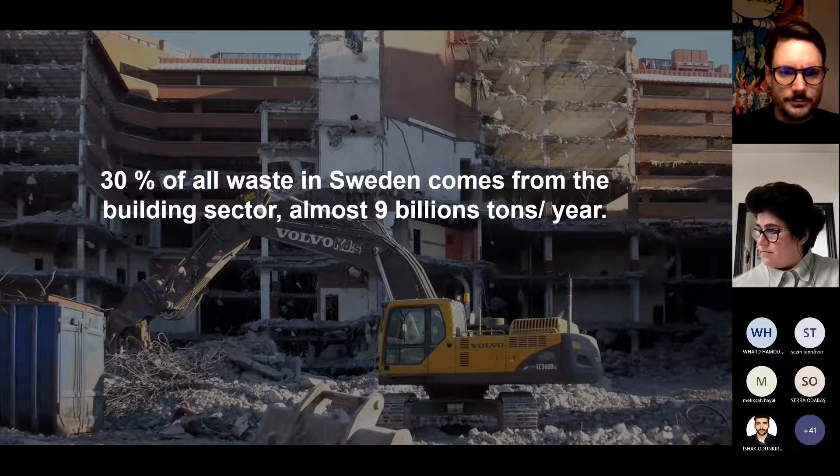At White, as the introduction said, I'm a partner at White. I've been here for 17 years. We work with sustainable architecture, which is one of our goals.

So we think that we have to work in an interdisciplinary manner in order to achieve this throughout the entire design process. We have architecture, landscape, urban design, interior design, project management, sustainability experts, lighting design, transformation, and digitalization, in order to create a holistic approach for sustainability.

Our goal is also to work with the process and the collaboration, because nobody is the expert, and we think that everyone can participate to create a better and richer architecture in the end. We're here for the long term, not just a quick fix.

We are employee owned, so you can only buy shares in the company if you're a part of the company. That means we are a quite resilient company. We don't have to do anything specific with our profit; we can do whatever we want with it.

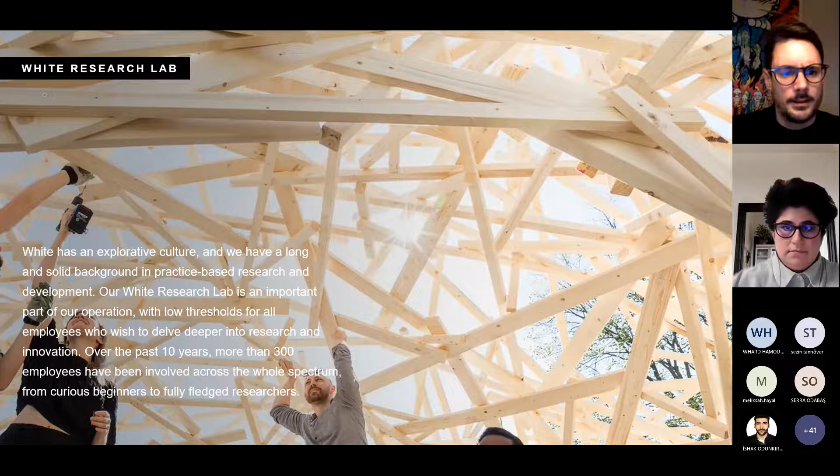We are a big collective gathered around a vision, and that is for all our projects to be climate neutral by 2030 through design excellence. We are following the Paris Agreement, and I'm quite glad that COP27 now recognizes that the built environment or construction industry is part of the carbon problem in the world.

That makes it easier to advocate different solutions, not just concrete and steel. This is a little bit about the history of how we got involved in this project, the Sara Cultural Center, which is the new landmark for Skellefteå. Having this research and methodology helped us convince our client to build this building in timber and not in the conventional method.

This is a culture center with 6 stages for performing arts. It has a city library, an art gallery, and a museum, which were located in different parts of Skellefteå before this competition. So they wanted a new home for this, together with a hotel and a conference center.

The site was the last unbuilt plot in Skellefteå, where this culture center sits. It was used as a bus station before, right in between the train station and the main square. As you can see, there is a sequence of public or civic buildings leading down to the Skellefte River, and by placing a public building here, it also mended the city fabric.

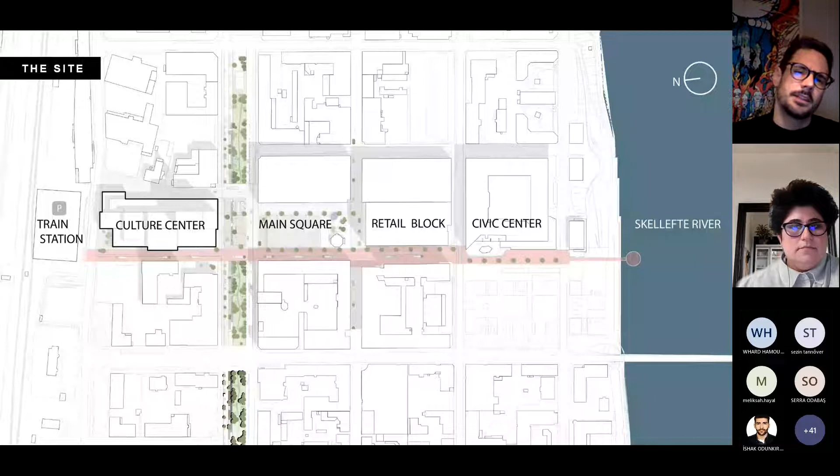For us, this was also a question of how do we challenge this institution to be something more than just a building or a destination. It also has to make the city grow on a larger scale, and interact with surrounding streetscapes in different ways. Thinking about the culture center as more than just a place where you go and see shows, it's also a place where people could meet, especially in this harsh climate, indoor, and co-create and participate in different culture events.

So for us, we started with the thought that no matter what institution was going to be in here, if it was the hotel or the large stages, we put them in the middle, and around it we allowed for people to actually flow around.

We created all the interfaces towards the street with accessibility, so we had entrances in all directions facing the streets. We didn't create any backsides. We also strongly believed in two entrances, one towards the main square and one against the train station.

So you had a flow through the building so that people also had an opportunity to walk through the building, not just a place where you went to and then back again. So there was a natural flow around this building, and with low thresholds around all.

What was happening inside, we also tailor the building towards its contents, creating different scales, because this building has a quite large program, and it was filling up the entire site. But we still needed to be connected to the city, even though we introduced a new scale as the high rise was meant to.

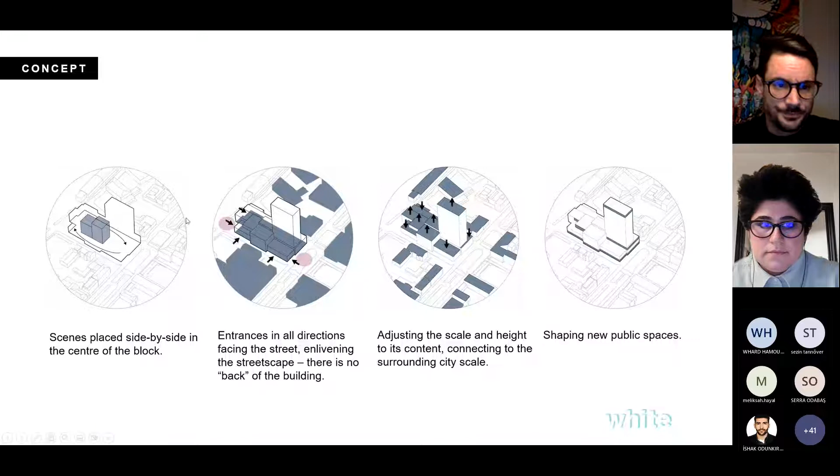Our proposal is called Side by Side, and this is an image from the competition proposal, where you can see the stages going as a ridge towards the high rise, and you can see it facing the main square.

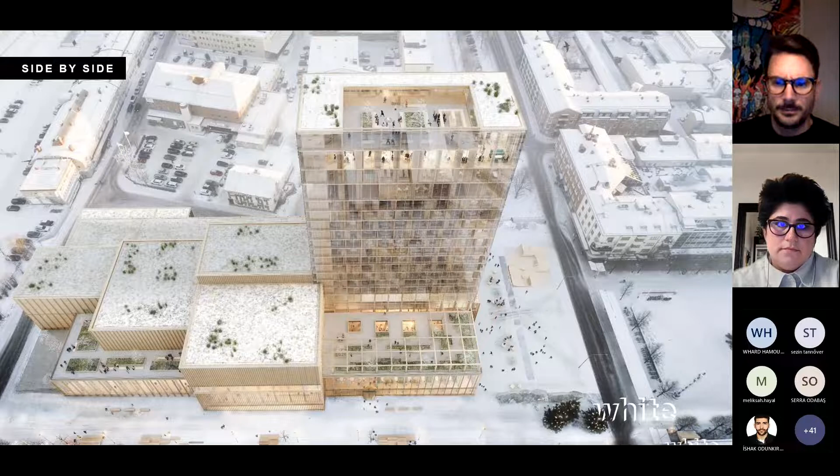So we created a new landmark for Skellefteå, but this is also the start of a new and bigger revitalization of the city. There will be much more high rises coming up within the next few years.

But making it in timber, we also created a softness, and we worked towards the city with something that people could connect to, and I think that was a success to get the citizens of Skellefteå to participate in this building and cheer for it.

We also worked a lot with the slender factor of the building, so that it didn't feel too massive. So we had a base with a timber facade.

And then the topping up, it's a glass structure that is wrapped around this timber structure within, so it reflects the sky and loosens up the relationship between the high rise and the sky, as you can see in the picture. It was also important for us to work with the horizontal lines and shadow effects that the facade creates, so it wouldn't be a flat facade.

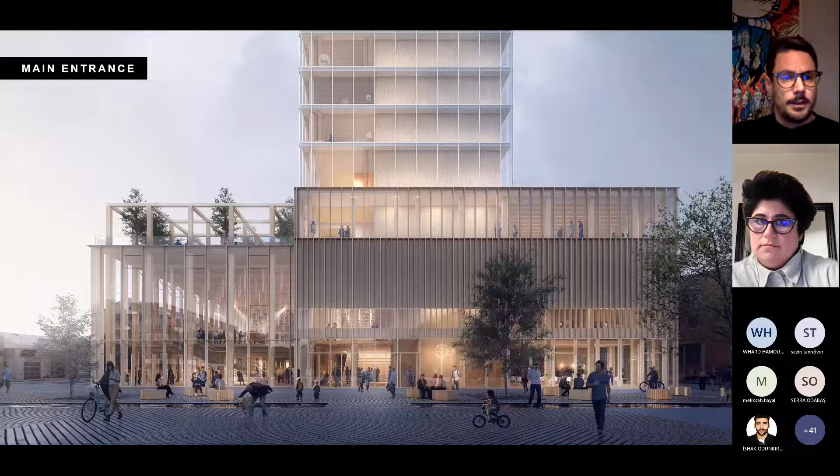The main entrance towards the main square is also a play in that you are accessing the building right underneath the high rise, so you're going in low, and then once inside, you have the library and the hotel on each side.

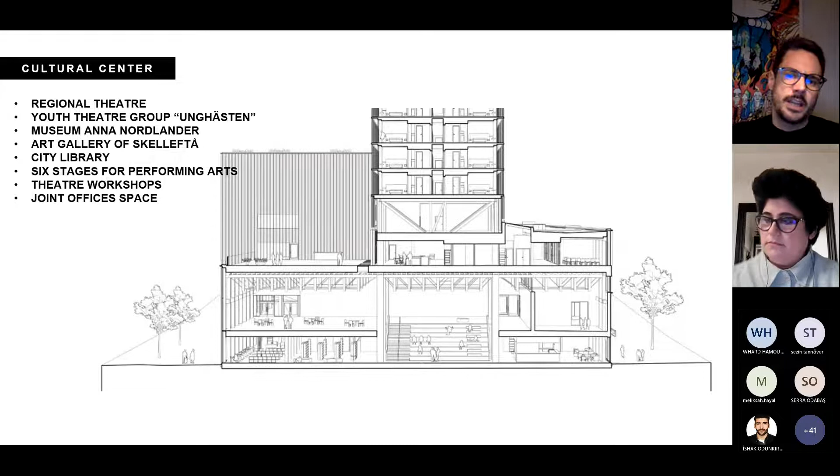But in the center you have this culture staircase, as we call it - the social staircase that connects all the different operations within the building. Here we wanted to have giant flexible rooms, so in order to achieve that, we had to work with trusses that we created exclusively for this project, creating an atmosphere for it.

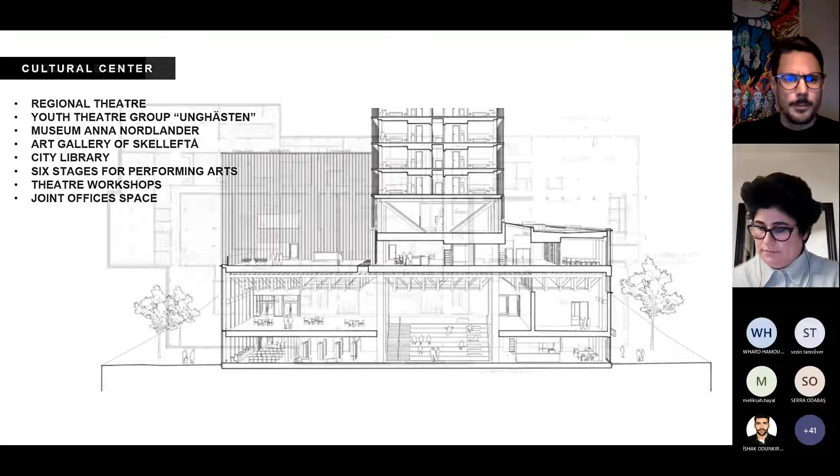As you can see here, the library runs all the way through alongside the plot. We have the hotel lobby, the culture staircase, and underneath this culture staircase is one of the smaller stages used for lunch performances.

And then, since this is a split level, most of the technique storage and services is also placed here. This is the basement area with the scenes.

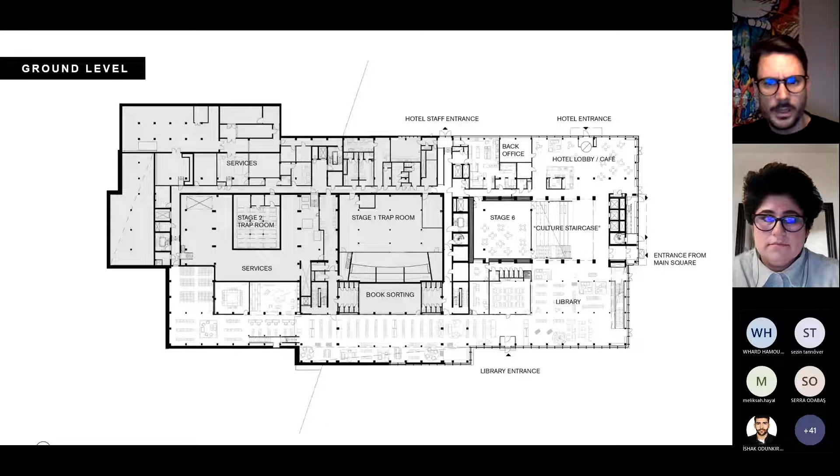And this is what you meet when you enter the main entrance, underneath the high rise. You can see the columns supporting the high rise are 600 by 800 millimeters in dimension, and it's almost like entering a forest with a canopy of timber trusses in the ceiling.

It was also very important for us to bring as much daylight into this building as possible, since it's a very deep building. We wanted to create a space where you can use daylight as the lighting, so that you can feel that this is somewhere, a place where I can really participate.

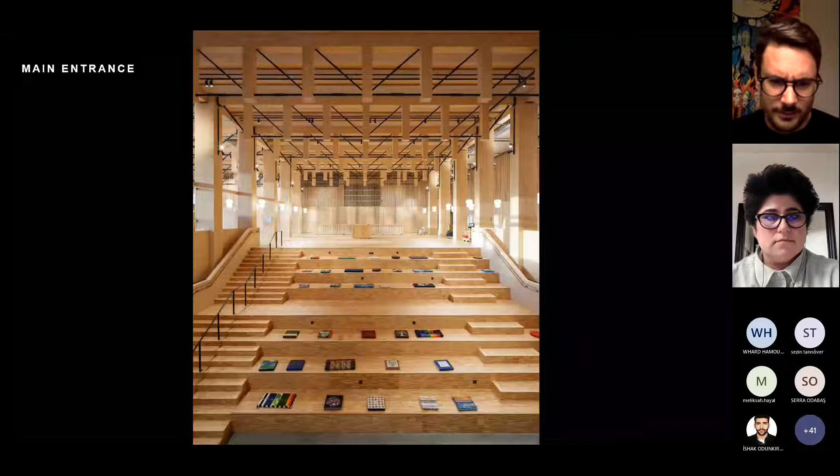Engagement was one of the key factors when we were discussing what this building was for in the first place. You can see the pillars, and the cushions on the staircase were made by the locals as a contribution to this space as well.

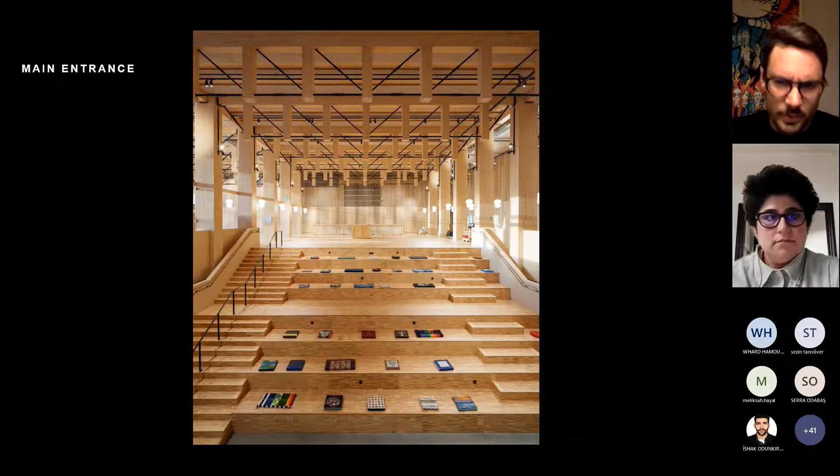There has been a lot of citizen engagement in this project, and even before the competition there was a lot of citizen dialogue asking what do you want in this city to make you stay, or to make you grow as a person. The result was we want to make a culture center where people can meet and co-create.

You can also look down further to see the library, and above it's the main foyer. It's a really interactive and transformable space, in that you can do whatever you want with it, but with a backdrop of only timber and this characteristic material we've used throughout the entire project. The visible timber was also something very important.

We were working with elements that we assembled together to create pattern and visual effectiveness, using simple measurements. We wanted to create a lot of complexity within the rooms - you can see the materiality with the visible timber. It's not perfect, but it's organic material that brings life into the rooms and spaces, all the way down to detailing.

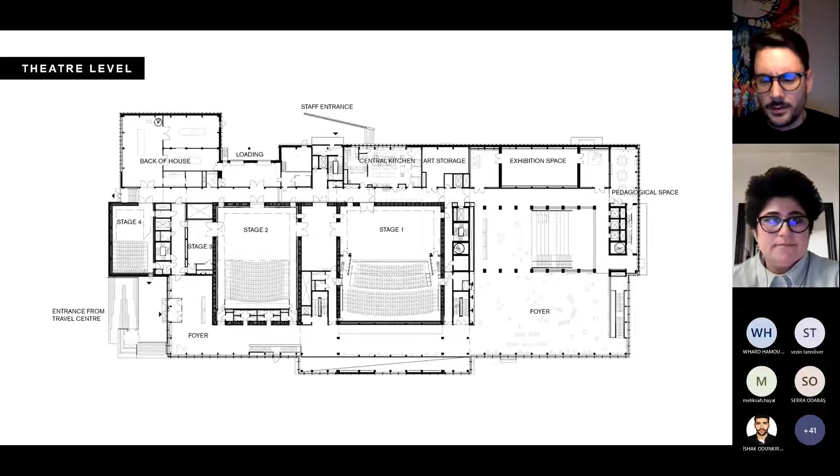For example, in this large foyer we have a dance group that practices here, since they have natural daylight and the floor really fits the purpose. But there are also a lot of yoga classes going on here at lunchtime.

People have really taken this building to their hearts and are trying to learn how they can best use it in their own way. Since the building belongs to them, it's a very nice interaction between the citizens and the culture center.

The Grand Auditorium, which is stage 1, is the largest of the stages, but also the one we worked on most with detailing. Here we also wanted to push the timber - everything you see is made from timber: supporting walls, ceiling, trusses in the ceiling, balconies, even the chairs.

We also wanted to create this monochrome sense, but with an intimate scale in this large room. For us, it was a duality between the spectators looking into the stage to see the artists, but also the artists looking up to the auditorium to see what was going on there.

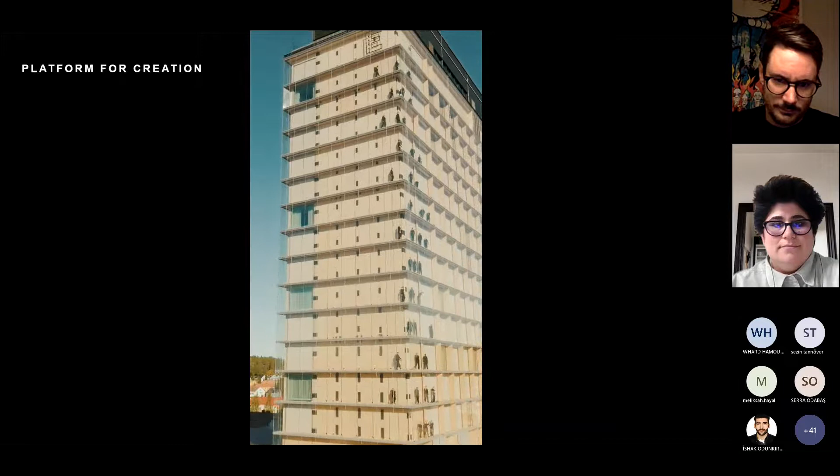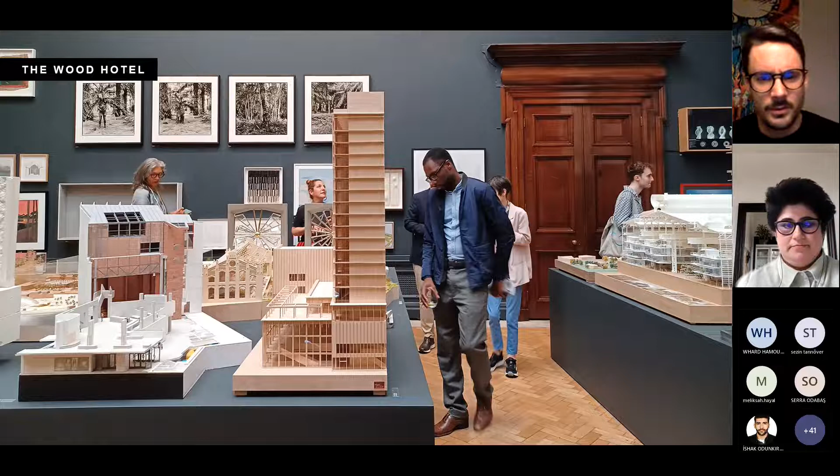The hotel. This is a quite big model we made for an exhibition in London earlier this year. It was their summer exhibition at the Royal Academy. It contains 205 rooms, 3 restaurants, a conference center, gym, and rooftop spa.

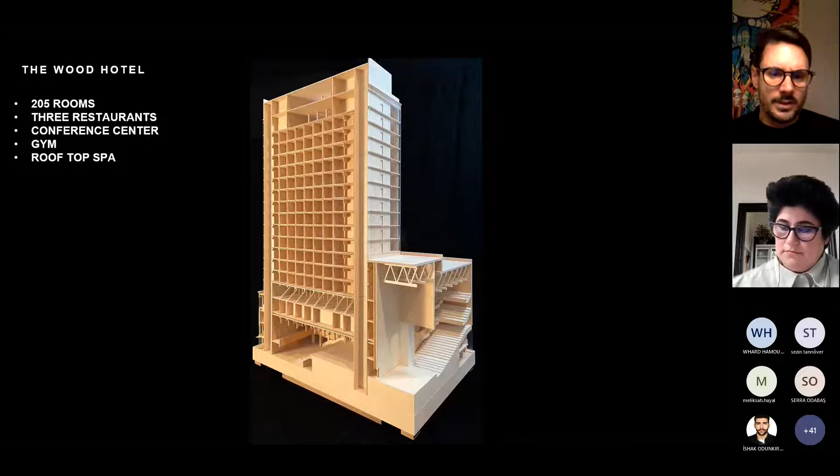As you can see here, it's connected to the main auditorium on one side, and then you have the main entrance just underneath the high rise. The layout for the hotel is a quite rational building, with a number of 18 prefabricated hotel pods stacked between 2 stabilizing cores in CLT on each end.

The direction is so that all the rooms could have a view towards the rivers. Also here, we didn't want to have a backside or a city side, we wanted everyone to experience the same, where it didn't matter which room you took in this building. Since the hotel starts at level 6, you have a quite nice panoramic view overlooking Skellefteå already from the lowest of the hotel floors.

It's connected with the middle corridor, basically. We worked with a measurement of 3.6 meter grid, which was suitable for the hotel room, and then we just laid that over the entire city plot. So all the pillars in this building have 3.6 meter spacing between them. But it also gave us a rhythm in the building that connected all the different functions around it. So it was quite successful.

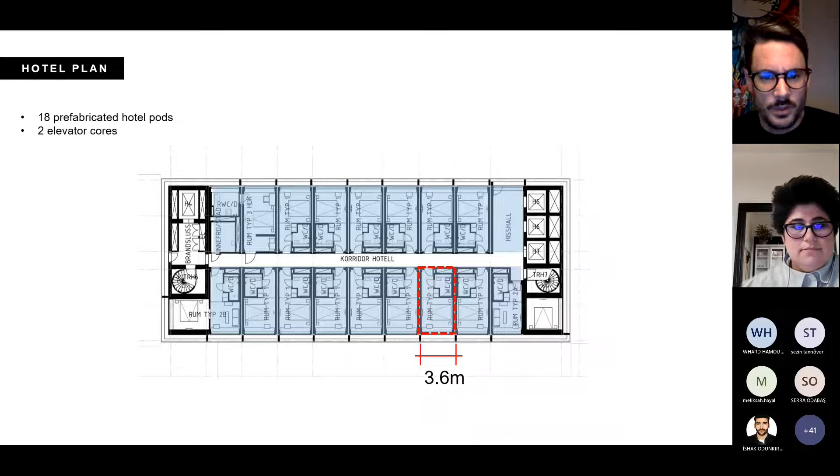This also allowed us to have visible CLT timber for the walls and ceilings, and also the amazing view from the hotel rooms in a one-sided glazing wall. This was a foggy day, so we didn't see much, but I think you can imagine.

At the top floor. On top of everything, we have a restaurant, and above that, we have a rooftop spa with a pool on top, so that you really can experience all the timber around. Because up here you almost don't see the city, you only see the surrounding forests while lying in this pool, which was a really popular destination also.

So all this different program in this very complex building has created a lot of solutions, almost like a library of solutions for timber structures. Not everything is in timber—we have a concrete foundation and a basement, but above that, all vertical loads come from either glulam or CLT. On top, we needed to add some extra weight.

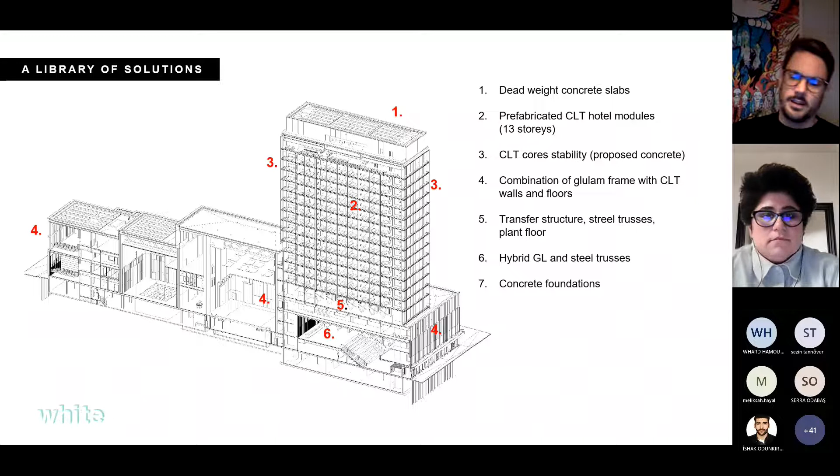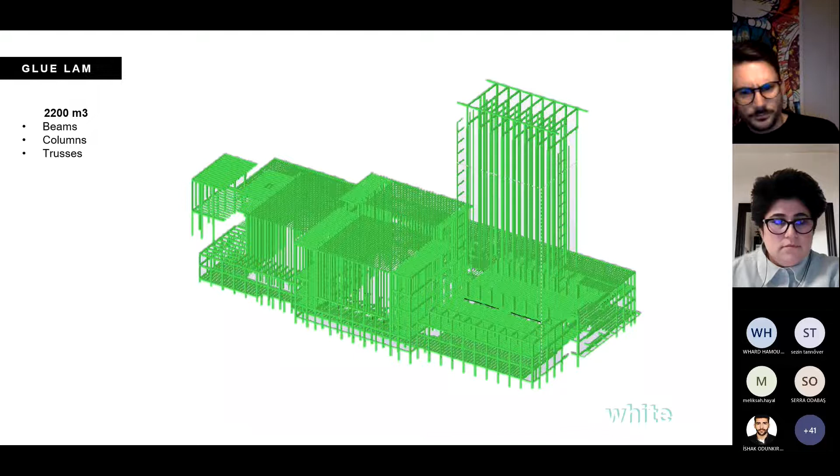Basically, it doesn't have anything to do with the structures, more the movement of the building, since the material is so light—this prevents it from swaying too quickly so you don't get seasickness. All the different CLT slabs in the walls support the high rise, bringing down all the vertical loads throughout the entire city block of the building. We have 9,500 cubic meters of CLT—shear walls, volumetrics, cores, and floor slabs. Then we have glulam in beams, columns, and trusses, and also some steel.

We have steel piles down to bedrock. We're also working with steel in these visible hybrid trusses, where we have an expression: timber takes the pressure mostly, and steel takes the tension. That's how we came up with the idea of creating those trusses. We also needed steel for connectors or brackets to assemble all the elements in constructing this building. In just the two CLT cores in the high rise, there are about 500,000 screws. So steel is our friend in this project as well.

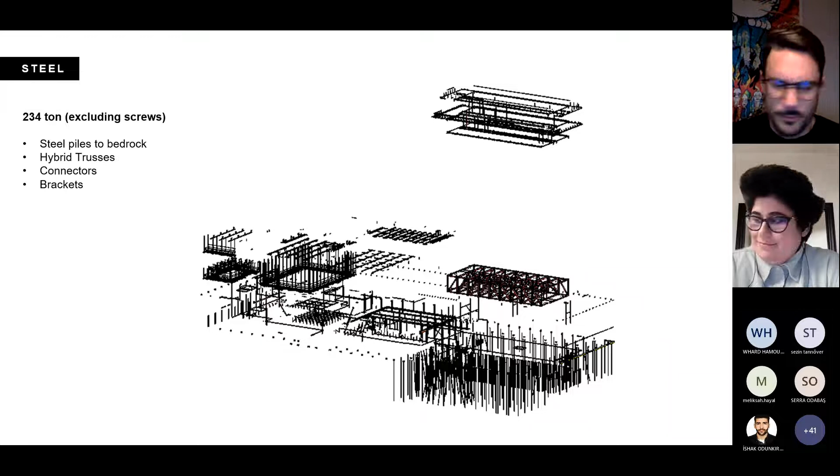But something that was really our friend was working with BIM, in our case Revit, as a tool for collaboration. We used it to coordinate, working with sustainability reports and dialogue with end users so they could experience what they were building, which has been really useful. We did quantity takeoff so we could calculate and estimate the building, working with visualizations, and creating a database for everything going into this building, also to be implemented once it's in use.

But also for reviewing collisions—so we have really reduced all the errors on site. Instead, we did it in our 3D model. That's something we've really worked a lot with, and it's been really benefiting this building, since everything in it is made from pre-manufactured elements in factories.

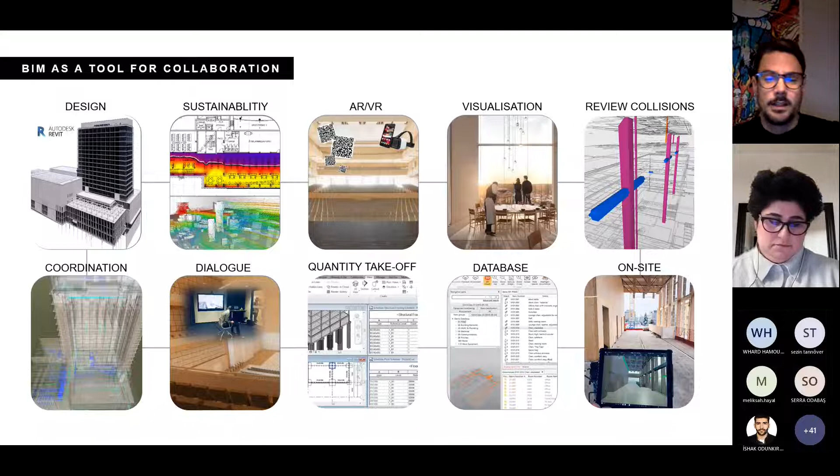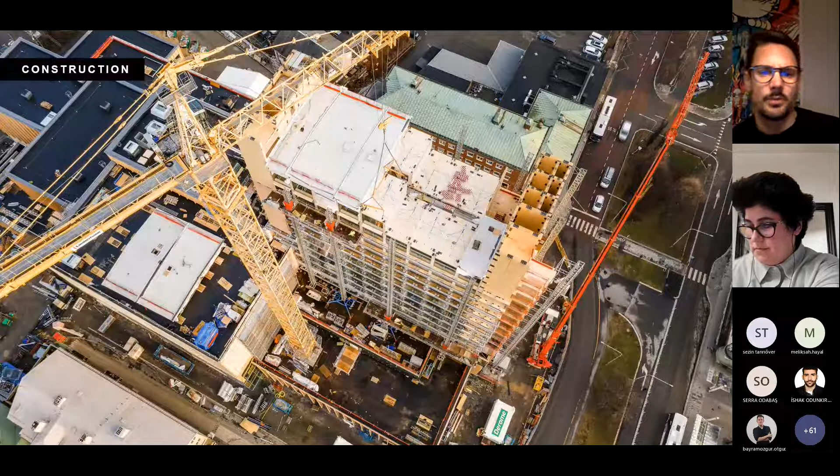The construction, working with timber in this way, we could shorten our construction time by about 30%, down to about 1 year, so 30% shorter. It was a silent construction site, so we didn't have any complaints over the entire time the building was here, and also a clean building site. We didn't have to use that many laborers on site. Instead, the laborers were in the factories working under safe working conditions, following different protocols so that nobody could get hurt.

All the timber was locally sourced, from a radius of about 60 kilometers around the sawmill. And the CLT factory itself was based only 50 kilometers outside of Skellefteå.

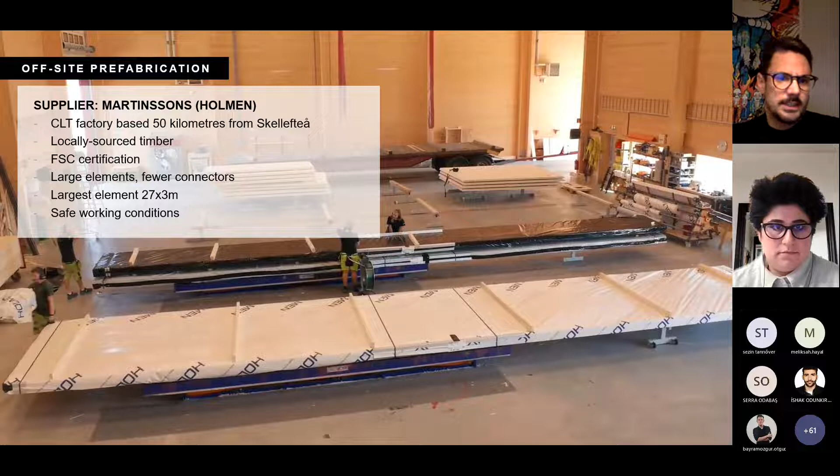Here we could work with larger elements so that we needed fewer connectors, which meant fewer crane lifts, speeding up the process. The largest element was 27 by 3 meters, which was quite big to produce in this factory. So 73 weeks of montage, and we had 80% reduced transportation, thanks to the lightness of timber, which is 5 times lighter than concrete, for example. There was a lot of benefit to working with timber, but we also had to brush off all the snow, since we didn't have any weather protection on site. That was maybe the one negative thing for this building.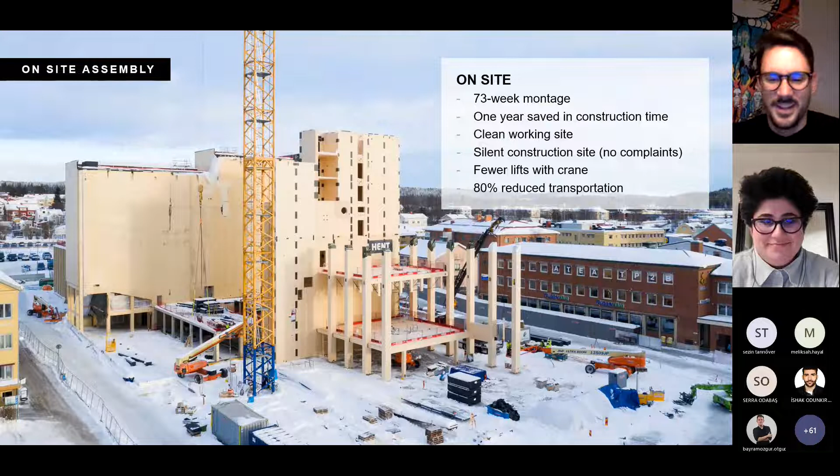The hotel rooms, as you can see, have CLT slabs assembled and joined with steel brackets, and on each corner glulam pillars connect one level to the next on top. There are also steel knives which connect them in the pillars, so you have stiff connections in this building.

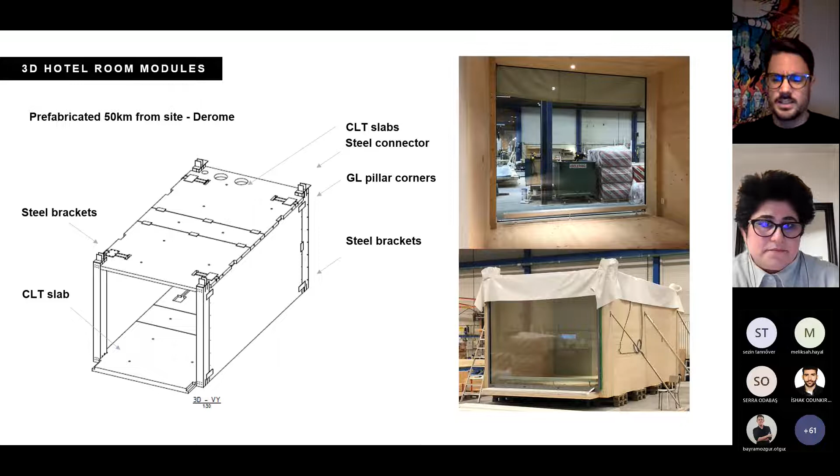Here you can see the drawings for it. It comes delivered with all the interior fittings, and also the bathroom, which was pre-manufactured in another factory outside of Skellefteå and placed into this pod. It was also delivered with a lip so that it could support the outer skin of the double skin facade, used both for buffering heat and cooling, and to integrate the solar shading inside this space. The only thing mounted on site was the outer layer of the double skin, a single glazed screen basically.

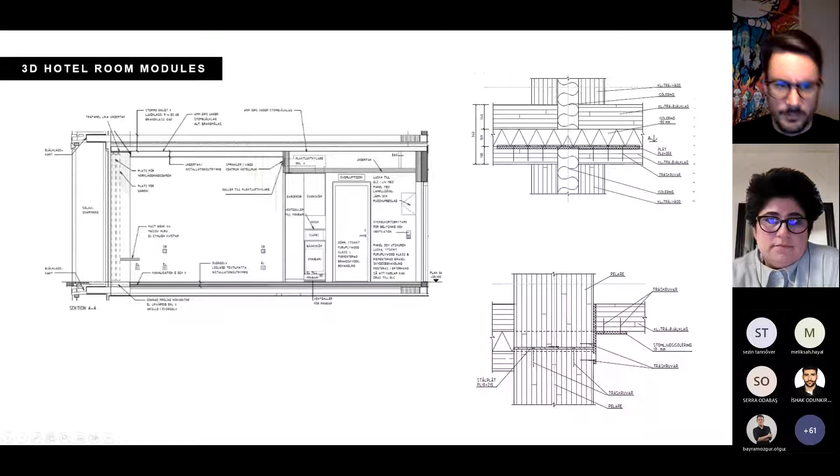Fire safety is of course one of the biggest issues and one of the biggest hurdles for timber buildings in most countries, also in Sweden. We had to rate this building BR0, the highest classification for public buildings with a lot of people in them. The hotel tower was rated R90, meaning you had 90 minutes to get out of the building securely until it could collapse. In the Culture Center parts we had R60, and we also worked a lot on the dimensioning of the escape paths and rescue routes.

The building is fully sprinkled, which is quite common - it's very common in Sweden for all public buildings to be. So that didn't have any impact on the price of the building; we would have sprinkled it even if it was concrete. But we also had to oversize the timber by 2 centimeters as extra security, to calculate in the charring effect. Timber is a very predictable material, so you can calculate how fast it will burn. In this case, since it's exposed like this, firemen entering the building can see if it's near collapse or not.

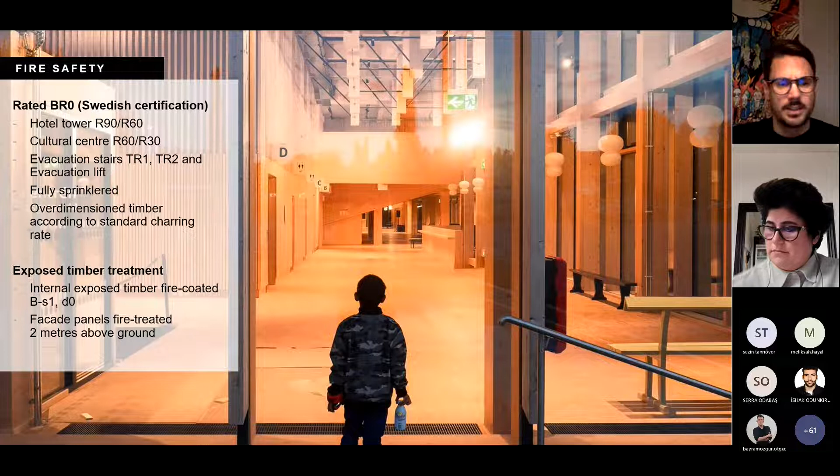We also worked with the operative energy performance. We have high performance envelopes, so we have no thermal bridges. We worked with fixed and mobile sun protections, hybrid ventilations, and the building is certified Gold for Swedish Green Building, which is the highest certification level at Sweden Green Building Council.

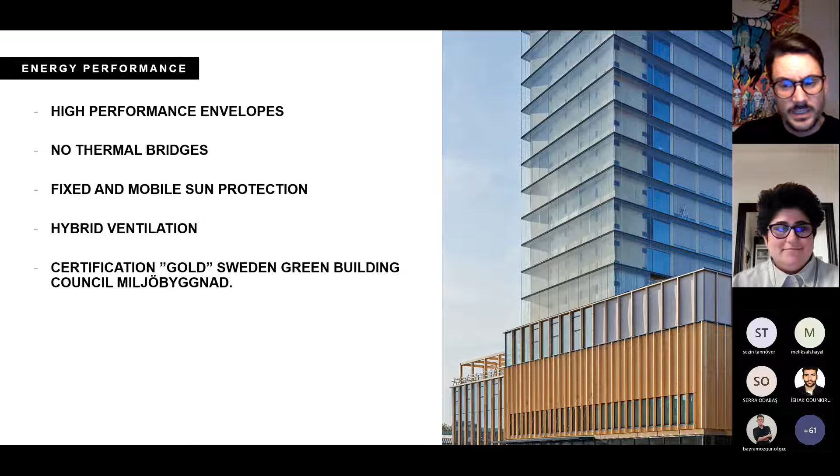We're working here also with a smart energy system, and by doing this, we have reduced the calculated energy by almost 45%. It's 50.6 kilowatt hours per square meter per year.

We connect the entire building through heat pumps and computers working with AI. We've connected this building to the entire city grid, so it learns the building's behaviors and optimizes energy use for this building and for others, so that we can save energy peaks, because that's the only time in the city where you need non-renewable energy in the system.

This was a revolutionary technique that has been developed by ABB and the local power company. So that innovation and mindset working with timber led to this idea that we can't have a traditional old energy system in an innovative building like this.

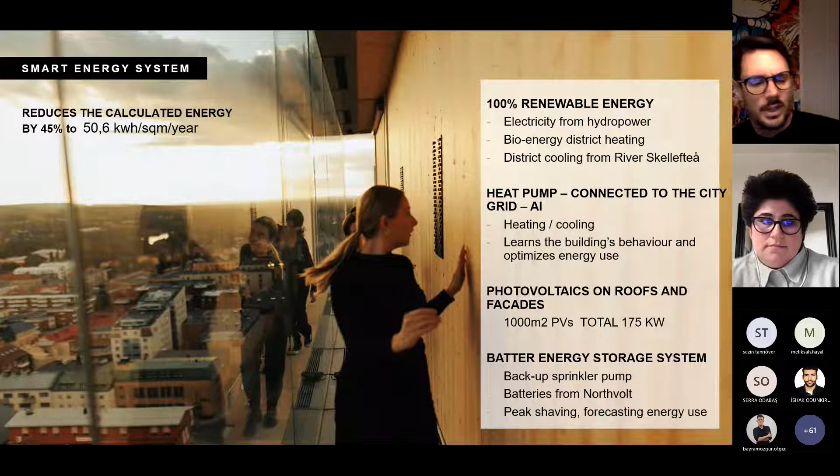So we need to think again. We also need to step up and see what we can contribute, as the local energy companies said. One innovation leads to another in this case. And once you put your head around it and have a new mindset, you'll see that there are solutions for all the problems, even though we had a lot of hurdles to pass before we could realize this building.

The environmental impact was, of course, the strongest argument for us working with timber, but back then we didn't really have carbon neutrality as one of our goals, or at least to calculate for it. We did this afterward, once the building was already built, so we had the data.

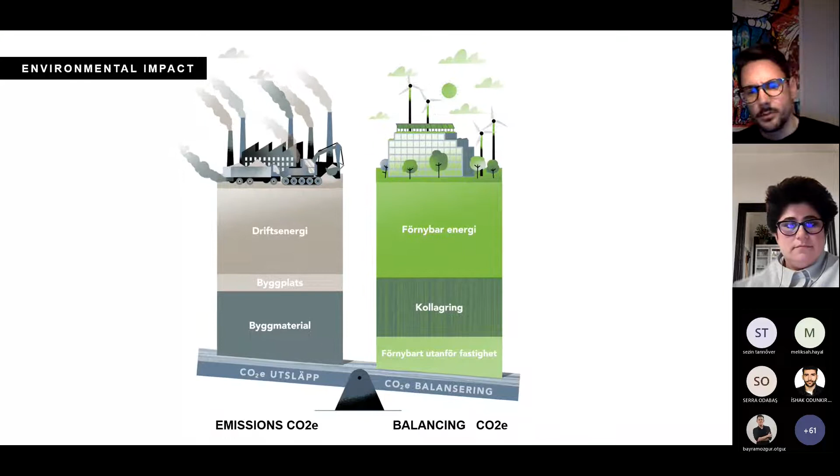Basically, it says that all the emissions from the building materials, from the working sites, and from the operational energy would be balanced if we have renewable energy, sequestrations, or renewable energy outside of the property. If we can balance this up to the CO2 emissions that we've put into the building, then our building is carbon neutral.

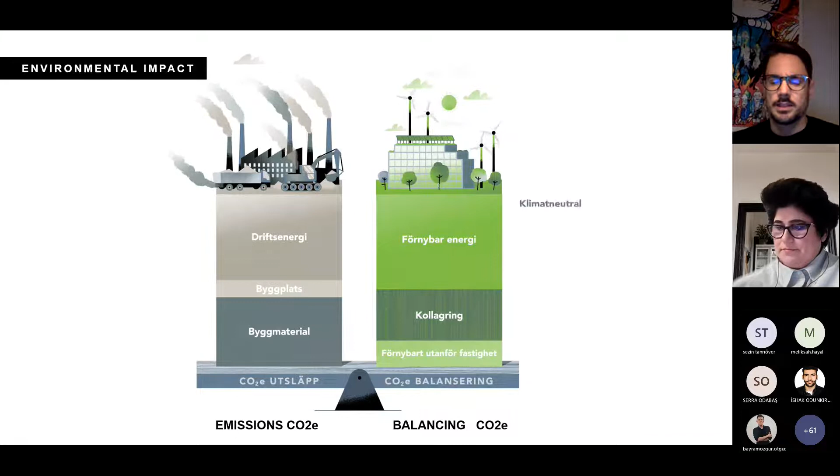We did a carbon assessment here, and you can see that since the materials are very low impact, we also have hardly any transportation, and we could save a lot in the construction process. We have a really low operational energy due to the efficiency of the building. We are almost at a carbon neutral building.

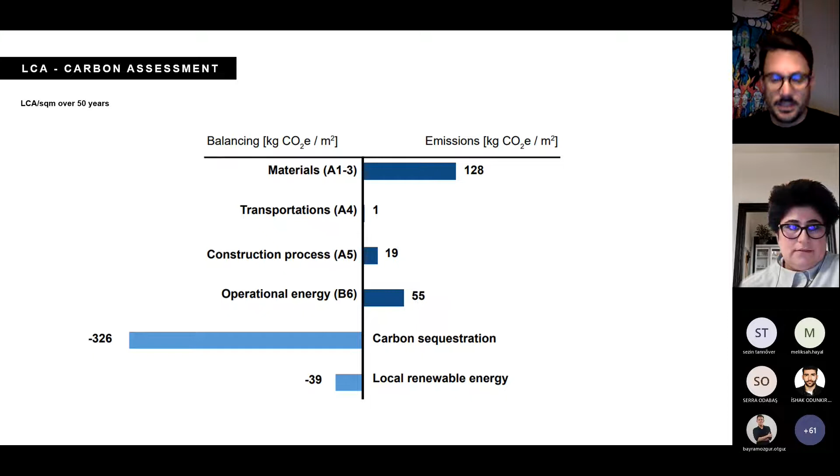But if you take the carbon sequestration into account, meaning that all the timber used in this building has been replanted by at least two new plants, that means the building works as a carbon sink. If you take that into consideration, together with the solar cells on the roof, we now have a carbon negative building, which works as the carbon sink I was telling you about. That was a good finding in this research paper we did.

The result is a new landmark for Skellefteå, but not only for Skellefteå, it's a sustainable landmark for the entire world. Time Magazine named this place the world's greatest place this year. So their brave initiative and investment has really paid off.

Since the opening of this building, new companies have been attracted to the city, working with green energy. Europe's largest battery factory, for example, has moved here, bringing 3,000 new jobs into the region. It's a success story showing that you can use sustainable design as a driver to encourage and empower an entire community.